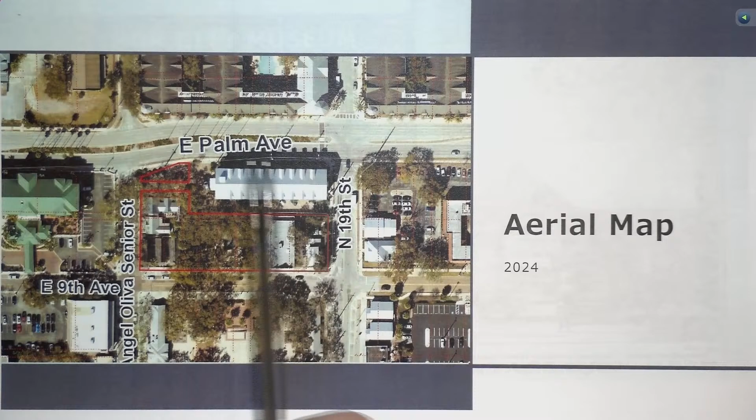This is the map showing exactly the area in question. On the east, you have 19th Street. On the west, Angel Oliva Sr. You have 9th Avenue to the south and Palm Avenue to the north. This is the Oliva Tobacco Company, which was here - now it's residential. And what's in red is Preservation Park.

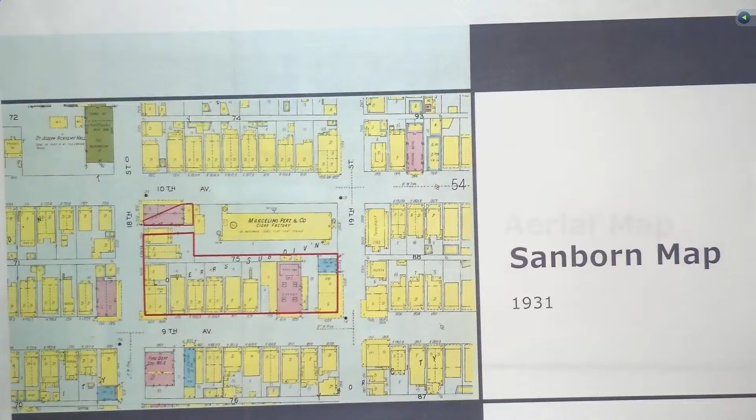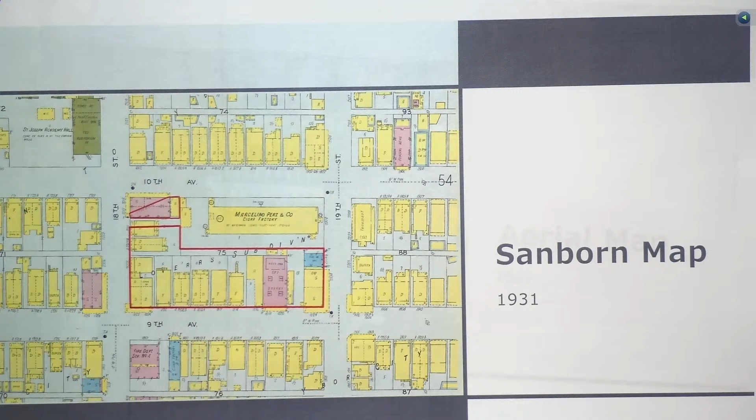That's the current view. Looking back on the Sanborn map, you see the density of the historic fabric there. One building jumps out at you - it was a brick building, the Ferlita Bakery, which I'll show you some pictures of now. But you see the stock of the houses, and part of this project was to recreate that block face.

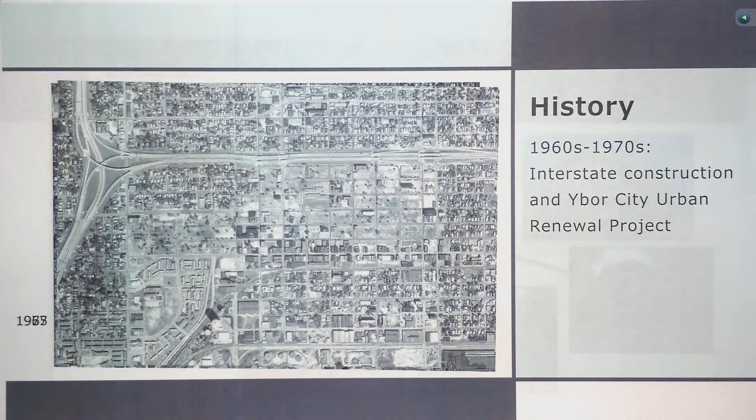Some of the positives that came out of it is that the bakery was in ruins for some time, and then there was attention to bring it back to its luster. This was in the early 80s - this is the creation of that area of land.

This is a state museum. You could go there, you could take your family there. There's a nominal fee, and you could walk the grounds. And they tried to recreate the interior to mimic what it was in the early 20s. So that's that section that we have today, and we're going to continue on with our public hearing.

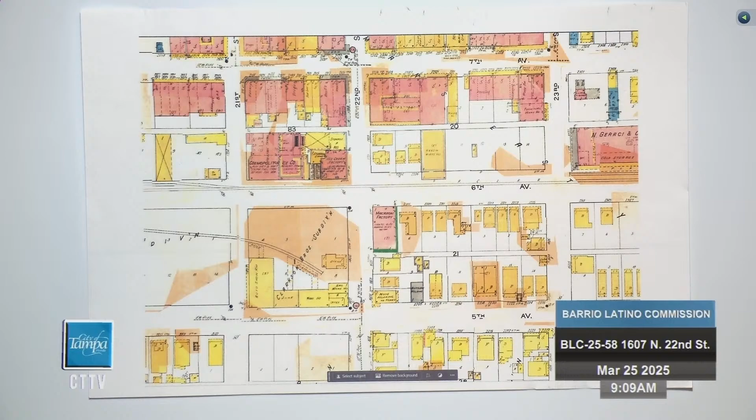So there's a structure here. There's a one-story structure that's contributing. To the south, you have a courtyard, a drop-off area, if you will. And then 22nd runs north and south. Once again, you have 5th Avenue to the south and 6th Avenue to the north.

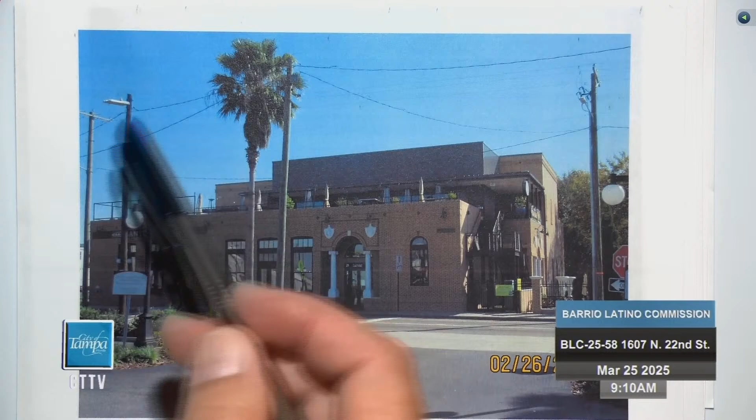We're going to be focusing on the upper level for the rooftop addition. The rooftop addition will be held to this portion over here, but just so you get a complete understanding of how the podium works on the building and then how it cascades up. Once again, over here is what they're asking for, and the drawings that I reviewed.

This is looking from 6th Avenue or the railroad tracks back towards the building. Looking down 22nd Street to the south. Moving around to the rear of the building. And just a quick shot upstairs, how they engage with the public up there.

I think this building is very important, and we talked about the history of it as well, so I wanted to share some photos with you. In the early 1900s, it was the Ferlita Macaroni Factory.

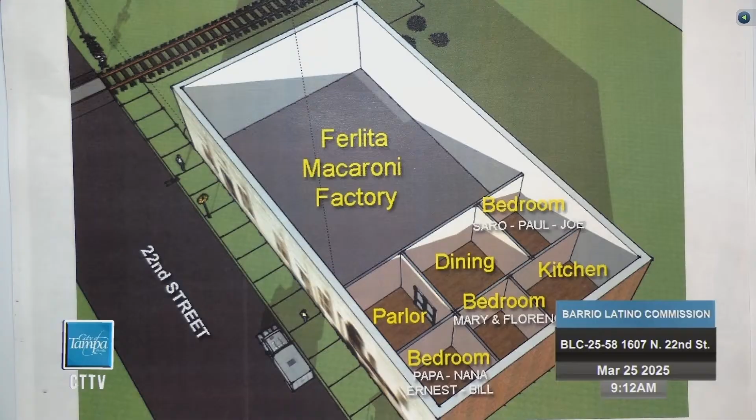The interior floor plan at that time had the factory, then kind of a meeting room, some bedrooms, kitchen, dining room. Adaptive reuse of the building, it went to a cigar factory, showing how it thrived in the area and supported families.

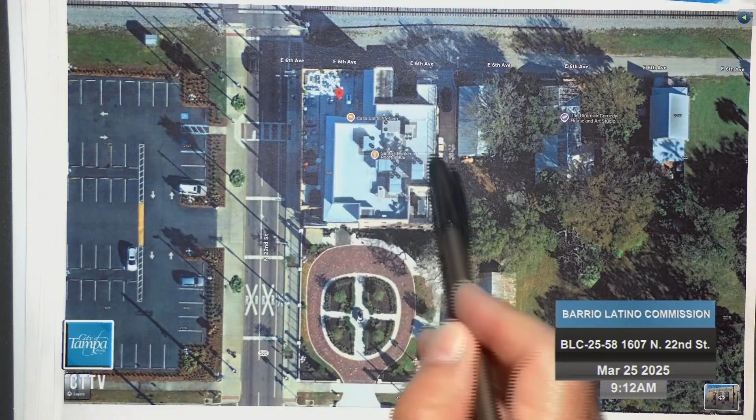And just to conclude, this is a current aerial. That courtyard drop-off area is about 22nd, and then here is the restaurant here, and you can see the rooftop here. So these pictures will be here if you need them through the presentation. And at this time, I'll introduce their team to move forward and do the presentation.

Morning, Commissioners. Jeff Shannon, General Counsel for Columbia Restaurant, 2025 East 7th. I'm here just to introduce four concepts, four themes that you'll hear these wonderful people behind me speak to in the next 30 minutes. The first is, of course, the local and the Secretary of the Interior standards are very important, but they also must allow for economic viability.

And in fact, Joe latched onto several of the bulletins that explain those standards, particularly on a federal level, and they point specifically to practical functions that may be introduced to provide more occupiable space to make the project more economically viable. That's kind of concept number one.

Concept number two is at the Columbia, as you all know, we're well aware of the history of Ybor City and Tampa, and we aim to be the caretakers of that history.

Number three, the planned rooftop has some structural changes or challenges that, unless we're able to proceed with some of our design, will be very difficult to implement. And again, all these points will be elaborated on in the next 30 minutes.

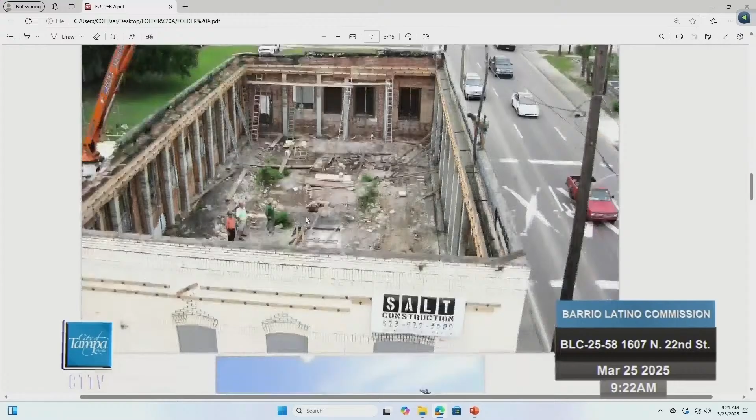So we'll keep going through these — the front and back views. I think this will pick it up, showing what you see there today. I think you have to go to the left one, all the way on the top left. Top left, yeah.

What you see there today is the 6th Avenue and 22nd Street facade, which has been completely restored. All the historical elements of the building were saved 100%. The parapet wall at the top has been saved. The building is probably in better shape than it ever was in its history, and that's thanks to the Columbia Restaurant Group.

We followed the guidelines and worked closely with Ron in his office. We've made compromise after compromise on some of the design features. We tried the awnings for shade and weather protection. The big awnings you see there, they didn't work. We tried smaller awnings, they didn't work either. People aren't going to make a reservation to eat dinner if they get rained on, and if they get rained on, they won't go back, so it's not good for business. I wish we could do more, but we can't.

Going back to the next folder. I want to add some street photos. You gotta get off this one. That's all right, I think you need to go back here. No, I've got it.

Ron showed you some street photos. We've got photographs coming north on 22nd Street, which is the traffic pattern there — it's all north, so anybody approaching this building by car is coming up. We started at 4th Avenue to see what you see going towards Santo Stefano. Just keep rolling through these as a progression of slides. As you move forward, there are 3 buildings between 4th and 5th Avenue.

They're all built right up to the street front, the property line, with roof overhangs that extend over the property line. The one on the corner of 22nd and 5th Avenue has a whole second floor projection and columns that go all the way to the curb. This one right here is on the corner of 5th Avenue and 22nd Street.

So looking at the street pattern, you can see Santo Stefano in the background, but you don't really see the restaurant until you get to or past Fifth Avenue. You can't see it coming up from Adamo Drive until you get that close, because these buildings are in the way. But these buildings also establish the character of the neighborhood. What's there now are buildings with second floors built all the way out to the street, to the property line — there's no setback, as staff has asked us to do on the second floor building area. It comes right to the property line, so keep going up the street.

Okay, go to the next one. Go to our drawings, section D. Gotta go back over here. The drawings that we submitted, we'll start here with the site plan.

The existing building covers pretty much the whole site from north to south. There's a paved area hatched on the right-hand side of the picture that would be used for staging, since that was one of the questions raised by staff. So we do have that taken care of.

Go to the next slide. The proposed floor plan for the second floor—remember that all this is there now. There's a paved area, the floor is paved, and there's a drainage system in the floor deck. All that has already been done, so none of it is new construction. The parapet walls are there.

There's an inside area directly in the middle, and the outside hatched area is the north end of the building where we propose to put a flat roof. The open area would still be on the right-hand side, which we'd like to enclose, representing the 70 extra tables. The hatched area represents seating for 110 people.

Okay, the next photo is the structure, which has come into question on the theory that we've been asked to set back 9 or 10 feet from each side of the building by staff. The existing structure—let me start with the floor. The floor is made up of a Holey Board system, a styrofoam lightweight insulating concrete.

We had to raise the floor on that deck over 12 inches, and we put drains above the roof of the dining area below to get all the rainwater off as quickly as possible and not flood any areas of that deck. So we built up the whole area, and there's nothing underneath this floor to support any new columns out in the middle of the areas.

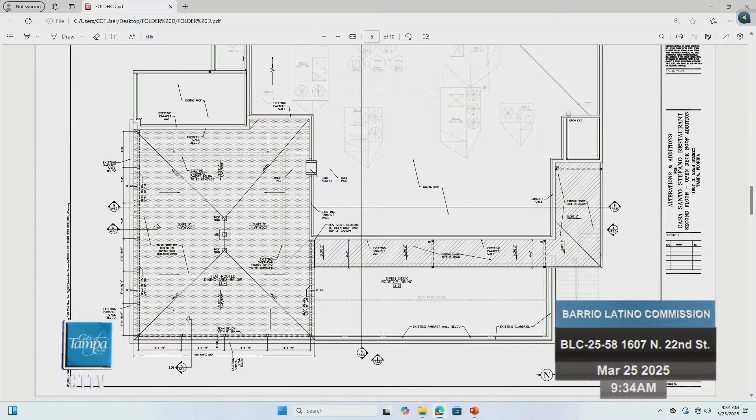What you see here would be the revised south elevation. What you see in the background is just a flat roof, and you really won't see that until you get past Fifth Avenue, headed to 6th Avenue. You don't see any of that coming up because of the other buildings, the trees, the signs, and everything else that's in the way.

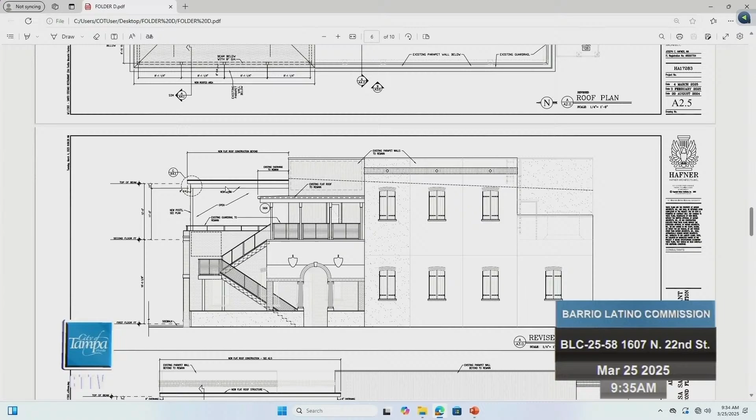The next elevation is a west elevation across the front, where on the right side you've got the open deck area. You've got a 6-foot canopy over the inside area that goes north to south. And then what we're proposing is this small area with the 4 bays that you see on the north end of the building. Next slide.

This would be looking at the north side of the building, where we have 6 bays with the same thin steel columns. So all you're going to see, and really you won't focus on any mass of that when it's open, because the columns are so small compared to what we're doing here.

Each section will show a sample there, and would have a roll-down built-in screen system on the inside that would provide the rain guard that we need for customers. That would take care of wind and rain. So you could sit next to this roll-down screen. We'd be able to drop the screens when rain was coming or starting to rain, and the customers would be protected from the weather.

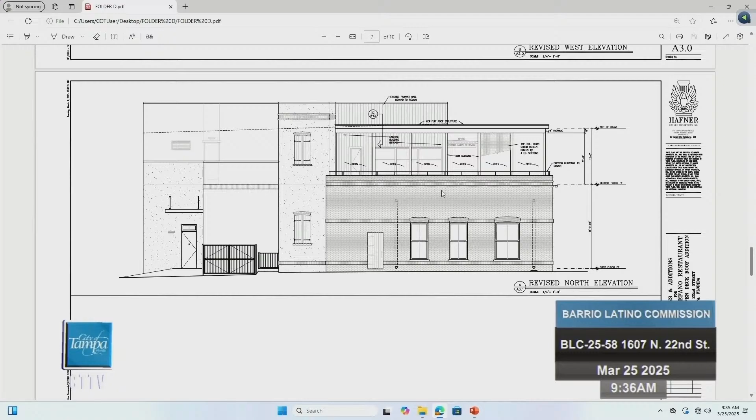I think we're too early in the process to make a final selection at this point.

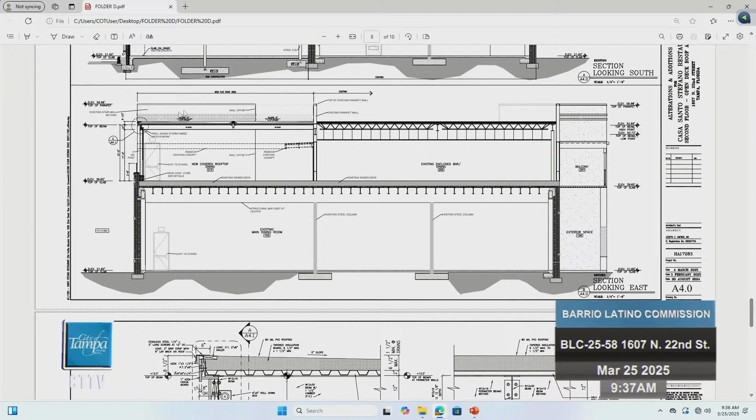Next we have a couple of building sections showing the buildup of the styrofoam system we used to level the sloped bar joist system below it on the second floor. The open deck area is to the right. This section looks east where you see the exit door into the stairs, and the enclosed area. The existing canopy over that area would be removed, and the roof would be what we're showing at the flat deck area.

The last drawing illustrates how we do this, and it took a lot of work structurally to figure this out and make this thing support properly.

We have to take care of 150-mile-an-hour winds. We have uplift, corner loads, and downlift gravity. That roof has to stay on that building next hurricane that comes through here. We only had 130 miles an hour last fall, but we have to design to 150 because it's an assembly building. That's our design criteria and the load we have to factor in.

What we've done is at the base of this, on the inside of the parapet wall on the left side of the drawing, we've built a concrete curb, which is more ballast or weight to hold down the uplift loads. From that, behind the parapet wall, a steel column goes up to the roof beams, which would be hidden from the outside, but on the inside they would just be painted black and concealed.

And then we have a thin insulated roof deck with sloping tapered insulation board to make our deck roof drains work. There's a blow-up of the edge detail to the right there, which shows where the roll-down storm shades would go.

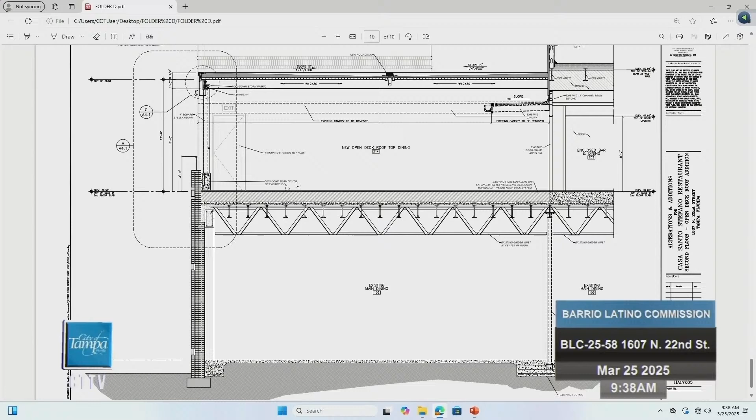Is that it there? Okay, and then another final one that shows a close-up of the section of what that flat roof would look like. It really only has a thickness of about 8 inches once we get down to it.

I think we go to the presentation section. Okay, and the 3 photos, building rendering. Yeah, okay, let's see here.

We'd be glad to come back and discuss any of these things in detail with you. We do have our structural engineer, Tom Dixon, with us today, who can get into any structural questions you might have. These 3 photos we have in closing show a complete roof over the whole building, which was the intent when we started back last summer of '24, to do a flat roof over the whole building so that second floor area for 300 people would be fully usable and occupable.

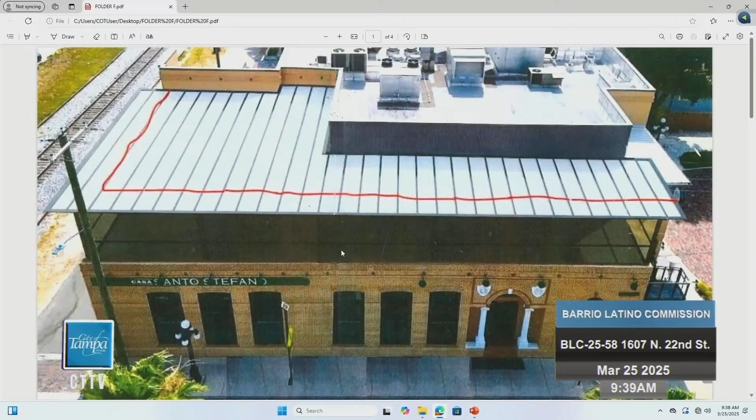Go ahead, next slide. This is what's there now with the umbrellas, and you see the higher section of the posts and the fencing at the north end there. We're going to be a few feet higher than that, but the change in the view of what you see on the building doesn't change. The historic value of the first floor and all the character it has is not touched at all by what we're going to do on this flat roof.

Next picture. Okay, this is kind of a doctored rendering of that corner shot. This would show the 4-inch columns going up. Telephone poles there now - that's not us. Yeah, we'll have a flat roof on it, and all you'll see is the fascia board on it. The next picture illustrates what shades might look like when they're down. I mean, there won't be that big a pattern, but we wanted to show something for you.

So that would only happen during rainstorms. If you're out on the railroad track looking at the building during the rainstorm, that's what you'd see. So I think that concludes what we can tell you. We have a lot more loaded into the system. If you have questions, we'd be glad to come back. Thank you.

One last point of interest, Tim Steele again with the Columbia Restaurant Group. We met with Mr. Vila quite a few times. I don't know if you remember this or not, but he said, I know what's going to happen - we're going to put the columns up and then you're going to want to close it in. Well, we're not wanting to close it in ever in the future. We've had huge success in our Sand Key operations with screens there. It's amazing how the water does not penetrate the screen.

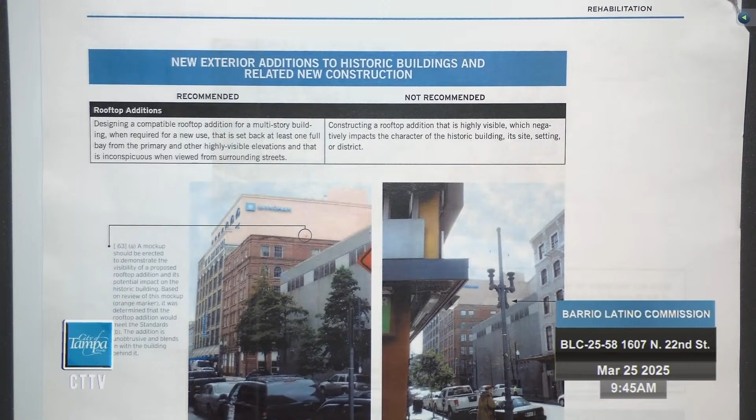They show some examples here as well of what's recommended. And then what's not recommended is to construct a rooftop addition that's highly visible. So that's what's in front of you this morning, to see the visibility of what they're requesting. What's recommended, once again, for rooftop additions is limiting the rooftop addition to 1 story in height to minimize the visual impact on the historic structures. And what's not recommended is constructing a rooftop addition on a low-rise, 1 to 3 story historic building that is highly visible. So that's the interpretation of what we're reviewing this morning, is the visibility.

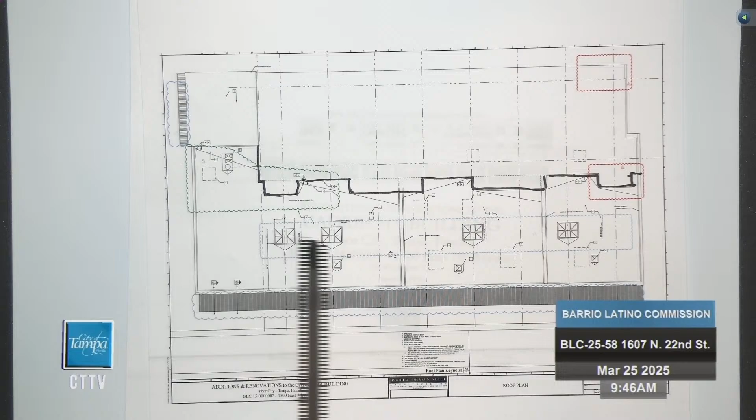I had to get at an angle just right to see the building at all, the 2nd story addition. To continue on, this is at 1901 East 7th Avenue.

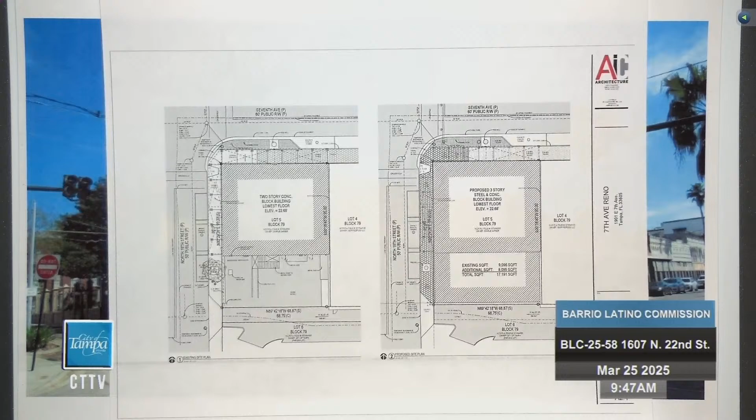This was the site plan that was presented. It was a 2-story building at 7th and 19th. They did an addition to the rear here. The rooftop, as I highlighted, so you can understand the perimeter of the building here, and the setback amount so the visibility is diminished as it moves forward.

This is the illustration that they provided of what you would see. This one's not been built, it's in permitting.

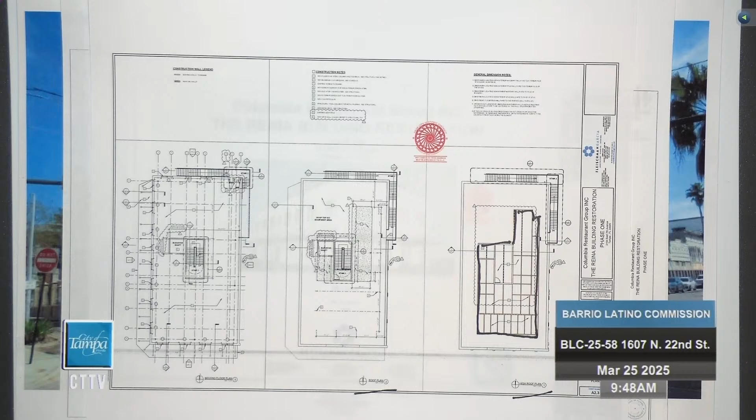And then lastly, on the corner of 21st and 7th, known as the Reina Building. Want to show you the rooftop. You see the perimeter parapet and how the addition of the rooftop was presented and approved.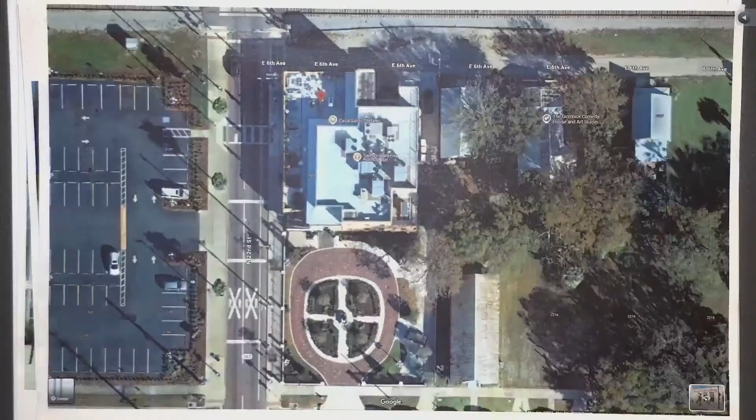And to conclude, this is the historic structure that functions as a restaurant, and that's the rooftop shot of it. I'll be here to answer any questions.

Okay, anyone here from the public wishing to comment on this case, please identify yourself.

Do we get to respond to that? This is public comment right now. We're gonna get into questions of the case. We will. Okay. All right, so no one for public comment? Okay, we're gonna ask the applicant some questions.

Vivian, you want to start us off? Can you tell me, please, the height? It looked like it was 11 feet. I couldn't read the dimension on the drawing over here, but it looked like it was 11 to the underside of the canopy structure and then 12 to the top.

Yeah, we can pull that picture back up. Joe Hafner speaking. I'm sorry? I said Joe Hafner speaking. We'll pull that drawing back up for you right here and explain it to you. Let's see, that was D. The 4.1. Yeah, I gotta go.

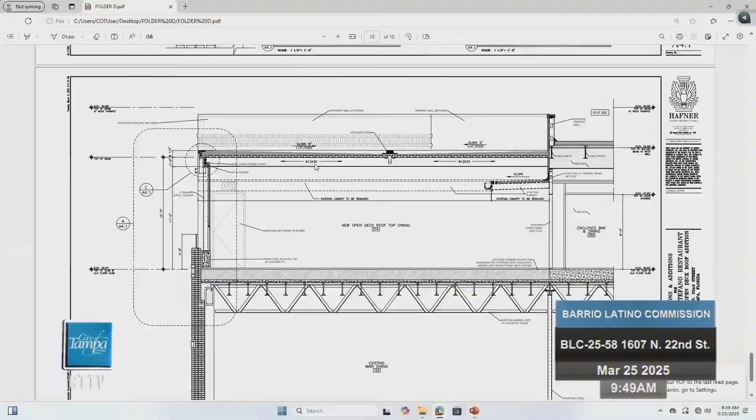Okay, this is this section here that's up on the screen. What we're doing is from the existing deck on the inside, which is lower than the top of the parapet wall. We're going up 12 feet to the top of steel, and the steel itself, the framing that runs primarily around the perimeters and stuff, is a 12-inch beam. So to the bottom of steel, we're 11 feet. We need the 12-foot, which will give us 11 feet below that. We need it for the ceiling fans, for light fixtures, for sprinklers, and all that stuff to go under the beams and in between. And based on that size room, anything smaller than that's just going to make a lot of noise. So that's, I hope it answers your question.

Well, yeah, all I needed was the dimension. Description of the fans. Okay, sorry. Didn't much matter, but,

And those columns are, as represented in your rendering, are black. They would be painted black. They're steel, what we expect right now are 4x4 steel, tube steel columns that would be painted black and not encased any other ways.

Okay, yeah, I mean, all the trim on the building now, the wrought iron and the railings, all that's black, and that's what we're matching to. Right. Okay, that was my only question.

Okay. So I should- No, let's see if there's anything else I need. Could you pull up the rendering that you had with the screens open? Yep, okay.

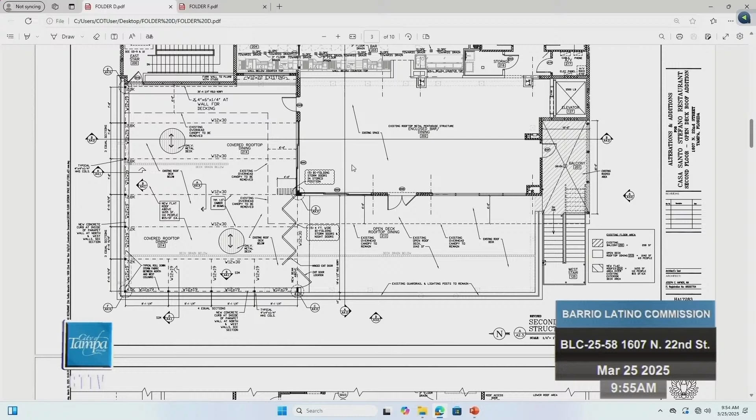Okay, your cover sheet kind of listed areas of renovation - we're doing this, we're doing that - but is that outdated? You're saying it's not interior existing floor renovation? No, no - the existing floor and the drainage system stays, parapet wall stays, all we're doing is putting a roof on.

A shaded roof area to the north - a shade, yeah, a northwest weatherproof roof on it. Okay, so the drawing...

And you're going all the way to the parapet wall, which is mentioned in the Secretary of Interior Standards, which you guys are following here because it is a historic building. You've taken ad valorem credits for the work here, so you acknowledge that it's a historic building.

So I think the main concern here is, why isn't that rooftop area set back a little bit from the front wall? And what I'm hearing is that you can't do it because of structural concerns? Right, that's a hardship, and by comparison, all the other pictures you saw were on Seventh Avenue, and this is a whole different zoning district with different rules.

But structurally, and we have the structural engineer that can explain it further to you, if you wish to talk to him, there is no structure that we can do between the parapet wall and the existing walls further back in the building because of the way the building is built. The styrofoam floor, we can't put any columns in. You've got to be able to have something to hold the edge of that roof.

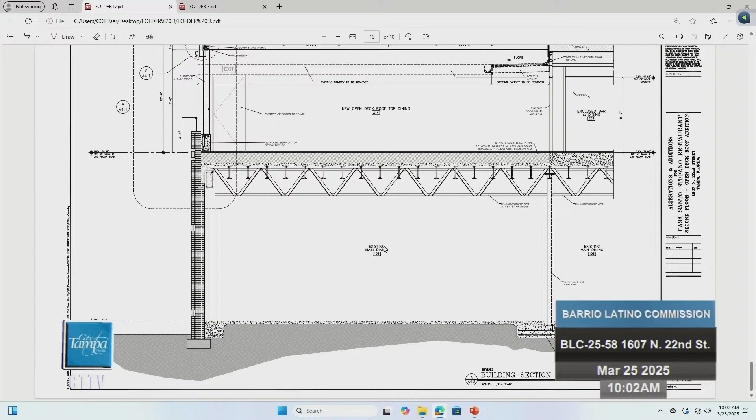My name's Tom Dixon, I'm a structural engineer. I've been involved in this project for over a decade, and I'm very familiar with the building. I would like to say that we have a functioning restaurant underneath the building.

The interior of the restaurant is pristine. We can't possibly have any leaks. Now, that was part and parcel to what we were going to do on the roof when we built the structure for the rooftop deck. Hafner had come up with a floor system that could support 100 pounds per square foot and resist rain. We don't want to have any drops falling even once in a while on patrons at a restaurant.

It's just terrible, word would get around, and that would be really the end of things, if you had a leaky restaurant with 2,000, 3,000 square feet of roof that had any penetration. So we made sure that the roof structure was strong enough. And with regard to this new structure that we're putting on, I would go back to the original structure, which actually did have a very robust perimeter, because when it was originally built, the roof structure spanned from perimeter to perimeter with big steel trusses. And this all caved in at one point in time. Ms. Salaga may know that.

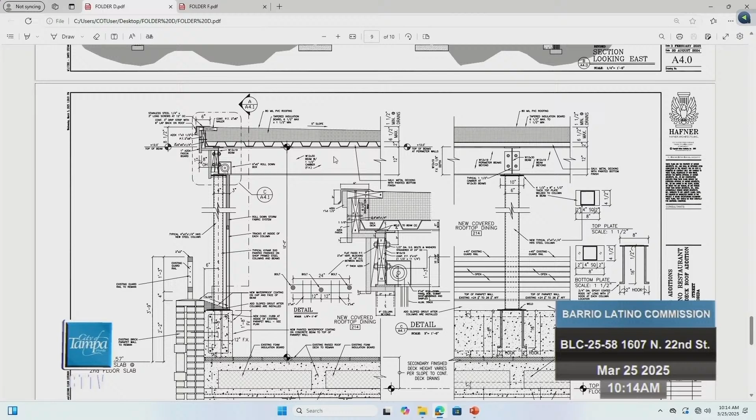Coming out there, and I think, from a historic preservation standpoint, you don't put an addition all the way to the front of a historic building. It's got to be set back a representative amount, kind of minimal. Except all the samples that Ron showed were solid structures. Now the solid structure on this building is set way back, it was there during the 2011 renovation, or whenever that had taken place.

Since 2011, what they're proposing now is simply a canopy. It's not an enclosed space where you would see a solid face. I think it's unfortunate that the renderings we've been presented don't really show the transparency as well as they maybe could have, so it wouldn't appear to be such a solid structure.

But when you're on the ground looking up at this, no one is going to see the building in the way that we look at it on a set of drawings. The public are going to be on the sidewalk, and if you're looking at that from the sidewalk, it just would be better to try, but this one you're showing us doesn't have the roof.

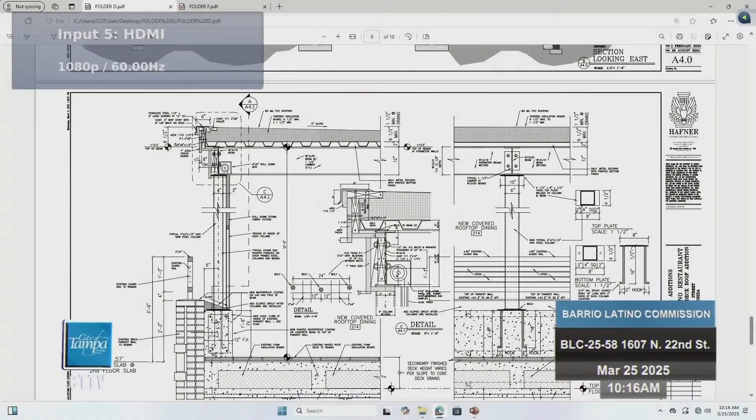Can you show the rendering? It's hard to, when you're at the building looking up, all you're gonna see is the edge, not the mass of the roof structure. You have to be maybe a block away to see the mass of it. It's hard to show this in any type of rendering, because we can show the posts and accurately the post height, but you're gonna have some type of roof that if you're far enough away, across the street, standing on the railroad track, you may see the underside of that roof.

And that's what we're trying to show, we're not trying to disguise it. But the closer you get to the building, all you're gonna see, if anything, is just the edge of it, and those little 4x4 posts, and I think the posts visually with the open air inside are gonna go away, and your focus is gonna be on the historical building.

But if you look at this rendering, the depth of the fascia surrounding it is heavy. The roof structure itself is heavy because you've got that additional 8 inches down below that you're trying to obscure the roller screen with. That's what's making it, in my mind, look more heavy than it necessarily needs to be.

The fact that it's on the edge of the building, that part doesn't really bother me as much, because it's a structure that if you took it away 10 years from now, the historic building would still be there and wouldn't be impacted or affected. It's just, for right now, the appearance of the heaviness of it - whereas a canopy structure ought to have an appearance of lightness and airiness and openness.

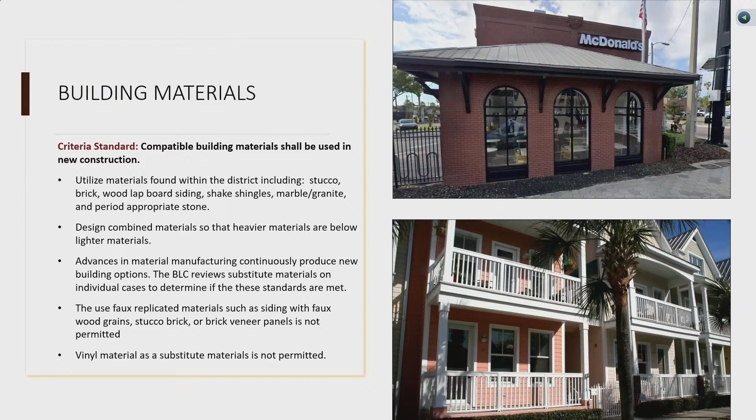Overall, materials proposed shall be similar in design and appearance to the historic materials found within the district. Vinyl and faux replicated materials are not permissible. Here are two new construction projects which successfully incorporated appropriate materials found within the district, such as brick, 5V crimp metal roofs, wood brackets, arched windows, wood windows, and wood siding and trim. That's basically what we're looking for in new construction.

The standards for rehabilitation recognize that flexibility is appropriate to facilitate a compatible use for the property while preserving those portions or features which convey its historical, cultural, or architectural values. With the national trend allowing for consideration of substitute materials, we too are engaging in the conversation on what is appropriate, and what we consider secondary, less distinctive features that would not alter the historic integrity of the district. So these are the areas we thought we could discuss for materiality: fences, siding, roofing, and windows. That's what we see the most of when we're reviewing materials.

For fences, wood is the traditional material in Ybor. We have picket, board on board, and box style fencing, which are all approved fences. Of course, we encourage wood fencing when people come in for their fencing options. There are also metal fences, which are traditional to Ybor City. One area that gets proposed and we deny is vinyl, which is not approved or appropriate. The shine on vinyl fences and the solid panels does not offer consistency with the historic materials found within the district. New chain link fences are also prohibited. We have chain link fences throughout the district that already exist; we don't ask that they be removed, but if they come down, they stay down.

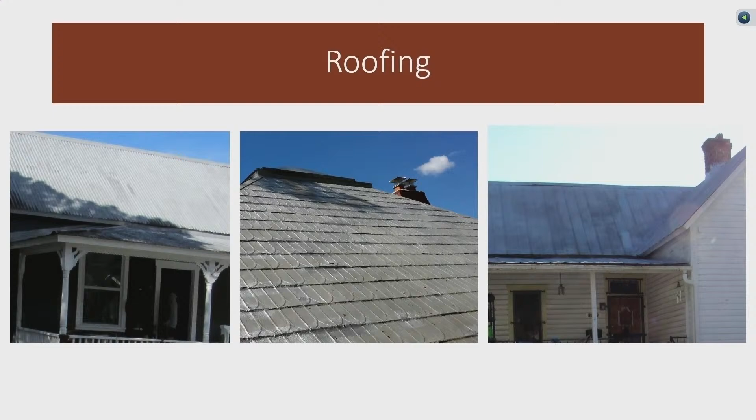Window materials. Historically, wood is the material used for windows. We have encouraged the preservation of wood windows that are in disrepair. However, in new construction, wood-cladded aluminum windows have been an appropriate option.

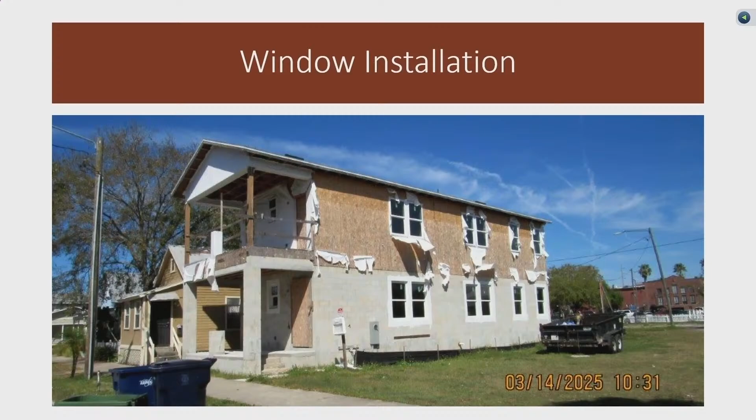So one of the areas we've also seen in new construction is called SIPS construction. It's a new construction method that has been used in the district as opposed to the traditional wood framing method. This method of installation allows for the appropriate window insets, as you can see in this SIPS construction here.

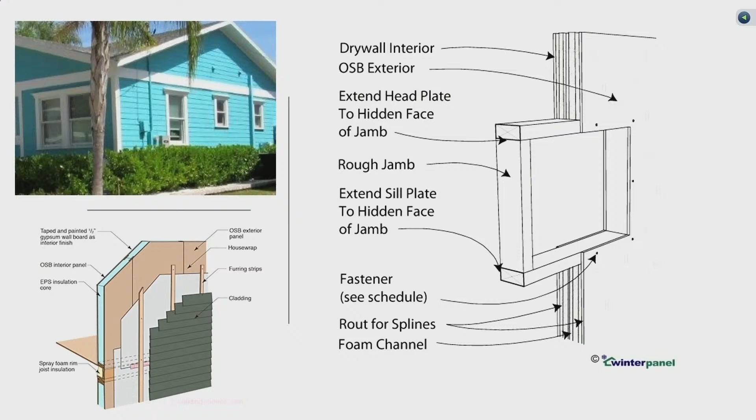In summary, the new construction standards encourage successful integration of new construction into the historic district. Our goal is not to discourage new designs or modern needs, but to ensure the overall compatibility and appropriateness for the Ybor City Historic District. With that, we'd like to open it up if the BLC has an opportunity or would like to weigh in on materiality in new construction.

I noticed in the roofing section there, unless you just didn't bring it up today, you don't address barrel tile roofs. Is that because there are none that exist in Ybor City and you wouldn't normally have that here? It's what we see less of. We wanted to address what we see the most of, which are the metal roofs. The barrel tile roof on new construction, we can discuss the materials, but we don't see that many replacements in Ybor City. But if it's not in the guidelines from the get-go, then there's nothing to put your finger on to say, yes, you can, or no, you can't.

It is going to be addressed in the guidelines. I was just using different material options. There's lots of options with barrel tile roofs. It is addressed in materials as saying that you need to reference what is within the district, and barrel tile roofs are referenced in the district. So that's the main standard for materials, is that it needs to be referenced from the historical context in the district. You have to pull from the historic palette that's within the district. And so if you can reference it, you may use it.